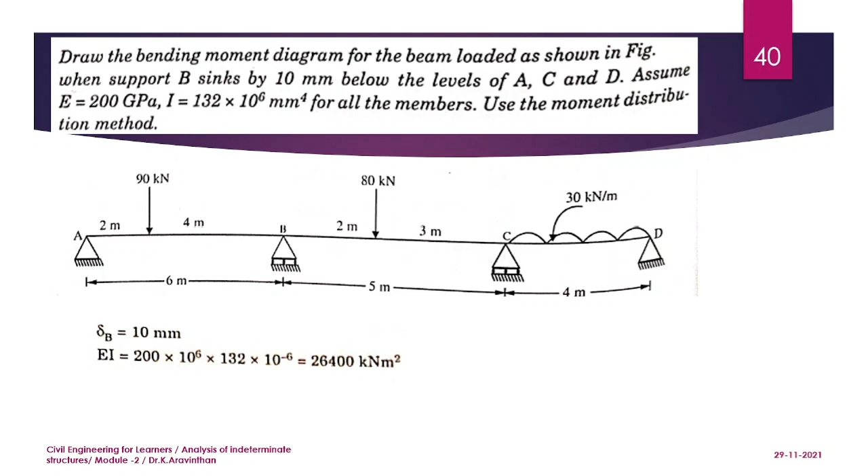Many things, those who are stopping, the good things should not be stopped. If it is stopped, then that is the prolonging of the wrong things which are happening in and around us. So, it is not for only projector I am saying. See sir, just if you switch it on another time I will do it, sir. Why sir you are speaking for such a 10 or 15 minutes for that? See, don't take in that sense. See, everything is a chain link.

You are having a point load of 90 kilonewton for the span A and B, and for B and C you have 80 kilonewton, and for C and D you have a UDL of 30 kilonewton per meter. See, this is the second case. In the last class we have solved a same settlement problem. A continuous beam which is having settlement is a second case in your analysis. First case is you will be not having any settlement in a continuous beam. This is the second case where you will be having settlement. Next case will be frame oriented problem.

Okay, when dealing with this settlement oriented problem, the steps are same. So what are these steps for solving by using moment distribution method? First one is finding the fixed end moment, and second step is finding the distribution factor. Step 3 is moment distribution, and step 4 will be final moment. So these are the 4 steps. Under one step you have some deviation; the rest of the things are same.

If you have any settlement, see, this 3 span continuous beam, the B support is settling. So if this support is settling, what happens? You will be having additional moment, and step 1 is writing the fixed end moment. In that I have given a formula for settlement of support. So what is that formula? In last class we have discussed a formula, 6EI del by L square. So this is the formula. Whatever span is sinking or support is sinking, at that span you have to apply this formula.

Fixed end moment. How to find the fixed end moment? So you have a span. What is the span? A and B. So this is joint A and B. You have a load of 90 kilonewton, which is acting 2 meters from support A, and it is not acting at the center. So what is the formula? W A B square by L square and W A square B by L square. These are the two formulas and you know them.

But another term is given. What is happening? A settlement is there. See, support A is not settling and support B is settling. So if this is sinking, this will be the deflected mode, isn't it? Like this, the structure is going to deflect. And what moment do you have to give in order to deflect like this? You should give an anti-clockwise moment. So hence the arrows are written here. And if it is anti-clockwise, you should use negative. So after writing WAB square by L square, you have to sum that, and while summing, this should be negative. So for MFAB and MFBA, you should use negative deflection.

And looking into span B and C, if support B is sinking, what happens? Support C will be at the same level and support B is sinking. You should give a clockwise moment, hence it should be positive. So you can see that 6 EI del by L square is positive here. So MF BC and CB have the positive sign here and you have to add in order to get the bending moment. So this is going to change. And for the span CD, you know that WL square by 12 is the formula. You can straight away use that.

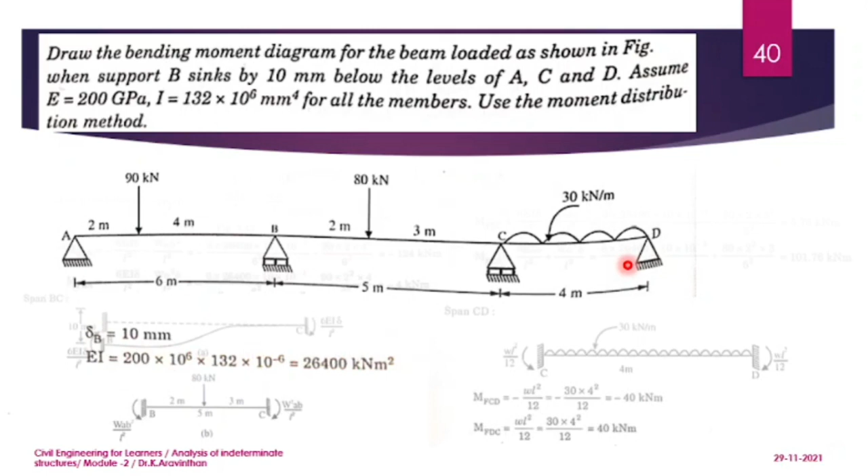Why is the deflection formula not used for span C and D? When support B is sinking, what are the members connected with support B? AB and BC. So hence you have to use 6 EI del by L square for spans AB and BC. CD should not be used with the formula 6 EI del by L square. Why? Because it is in no way connected with the deflection. Hence in its fixed end moment you will not have 6 EI del by L square. So check whether you are getting the same answer. Students, are you getting this answer? Minus 124

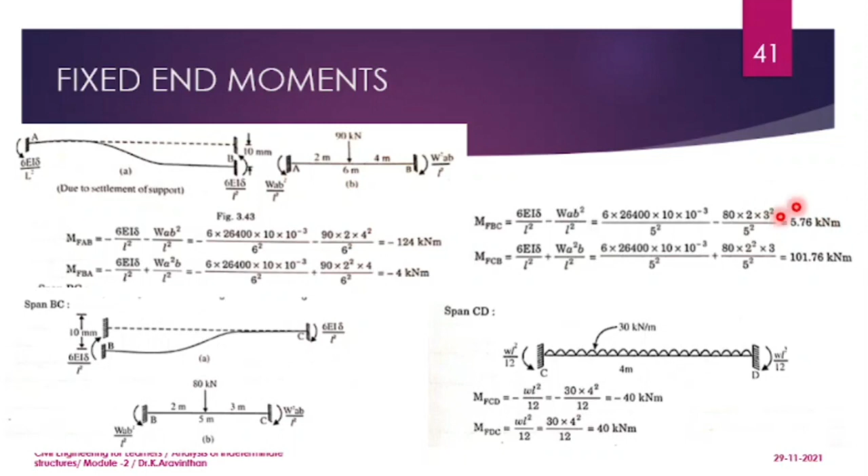minus 4 kilonewton meter. See, normally MFAB will always be negative and MFBA will always be positive. But why are you getting negative here? In a conventional problem, you will get a positive value here, isn't it? Why are you getting negative here? See, you have settlement here. Due to the settlement moment, the positive moment is fully taken, and you will only have the net bending moment. And here you can see that both are positive moments. Yes. Next, write down the next step, the distribution factor: joint, member, relative stiffness, sum and distribution factor.

You know that there are two supports which are intermediate. What are they? Joint B and joint C. So you are having two joints which have a distribution factor, and when you are considering joint B, what is the opposite joint of B? It is purely hinged. If it is purely hinged, you should use 3/4 I/L.

That is the formula. Then while taking B, B to C is partially hinged. Partially hinged in the sense it is intermediate between the two supports. Hence it is called partially hinged or partially roller. So you will be using I/L as the formula. The same way, C to B will be I/L and C to D will be 3/4 I/L.

Substitute this, you will be getting the sum of stiffness. So what is the sum of stiffness at joint B? 13/40, and for joint C you will be getting 31/80. Everything will be in terms of I. Now how to find the distribution factor? Divide 1/8 by 13/40. This will be your distribution factor, and 1/5 divided by 13/40. You will be getting the values.

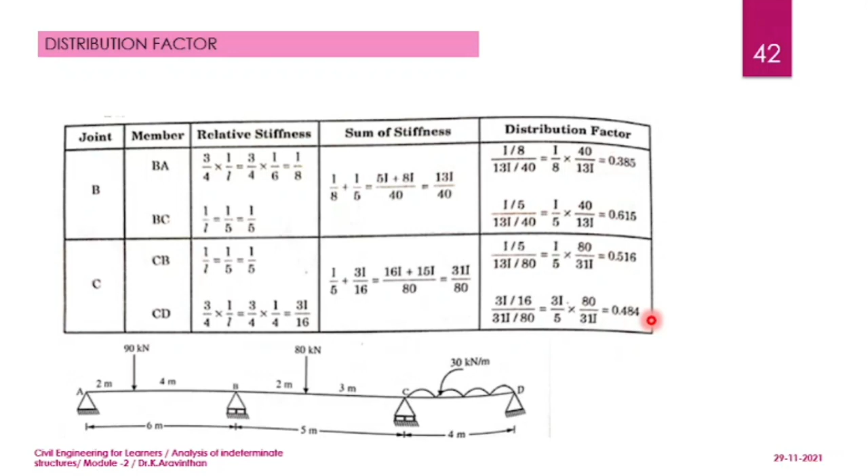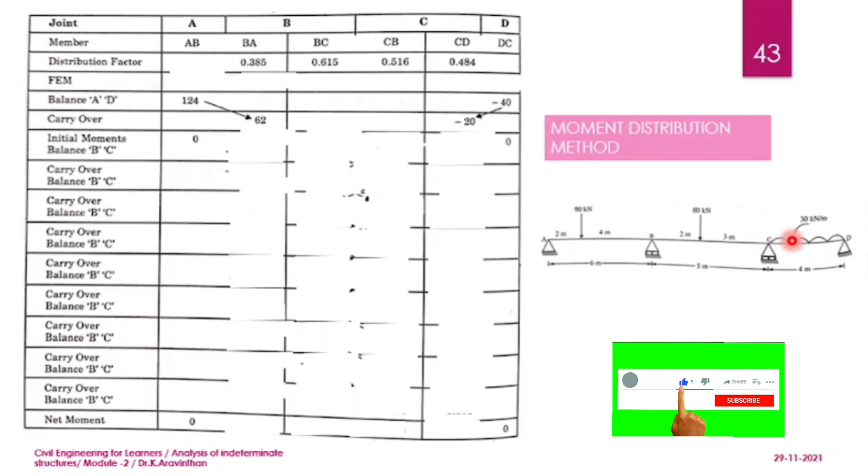So your answer will be 0.385 and 0.615. Similarly, when you add them, you will be getting 1 as your answer, and the next span will be 0.516 and 0.484. So this will be your distribution factor. Now the joints: how many joints are here? A, B, C, D. There are 4 joints, and below that you should write the members: A to B, B to A, B to C, at joint C you will have C to B and C to D, and at joint D you will have D to C. All the members are written here.

And what is the distribution factor you got? At joint A you will not have any distribution factor. At joint D there will be no distribution. At joints B and C, you got 0.385 and 0.615 at joint B, and at joint C you got 0.516 and 0.484. Next step is fixed end moment. The answer you got in step 1 is minus 124, minus 4, plus 5.76 and 101.76, and finally minus 40 and plus 40. So these are the fixed end moments you got.

Next what you have to do is balance. Why do you have to balance? See, your support A and support D are not fixed, they are hinged. So you have to make the 124 moment into 0. How? You have to add a moment of plus 124. The same way at joint D, if it is plus 40, apply minus 40, and half the moment will get carried to BA. If you have balanced at AB, half the moment transfers to BA. Likewise, if you have moment at DC, half the moment gets transferred to CD.

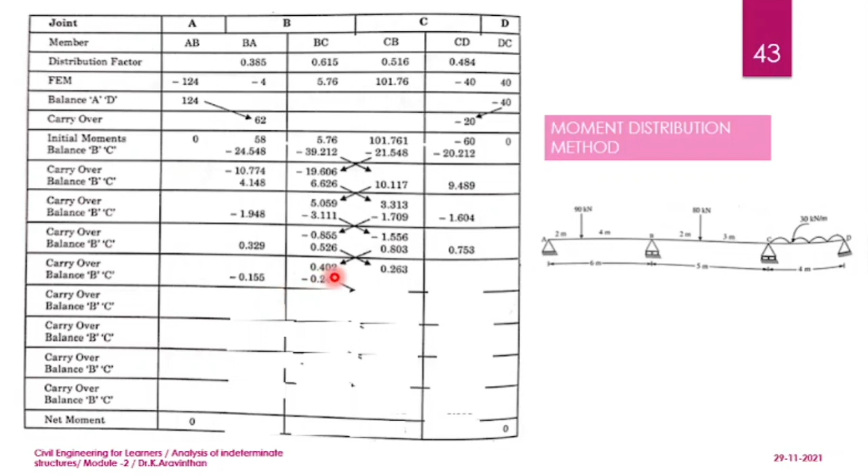Minus 0.402 into 0.385. It will be 0.155, and minus 0.402 into 0.615 will be minus 0.247. The same way, minus 0.263 into 0.516 will be 0.136.

Next value, minus 0.263 into 0.484. What is the answer? 0.127. Yes. Now it is nearly coming to, see, before the iteration you got 0.5, now you got 0.24, and if you carry over the half of the value, you got 0.068, and the other value is minus 0.124.

Now balance this 0.068 into 0.385, and you got 0.026, and next value will be 0.042. Now joint B is nearly balanced. The joint B is nearly balanced, you got 0.0 value. Now you have to concentrate on joint C.

Plus 0.124 into 0.516, you will be getting 0.064, and next value is 0.06. Yes. Now you can carry over this value. You got 0.032. Now you can stop with this. So with this you can stop, or else you can make two more carry over. So in examination point of view, you can stop with this.

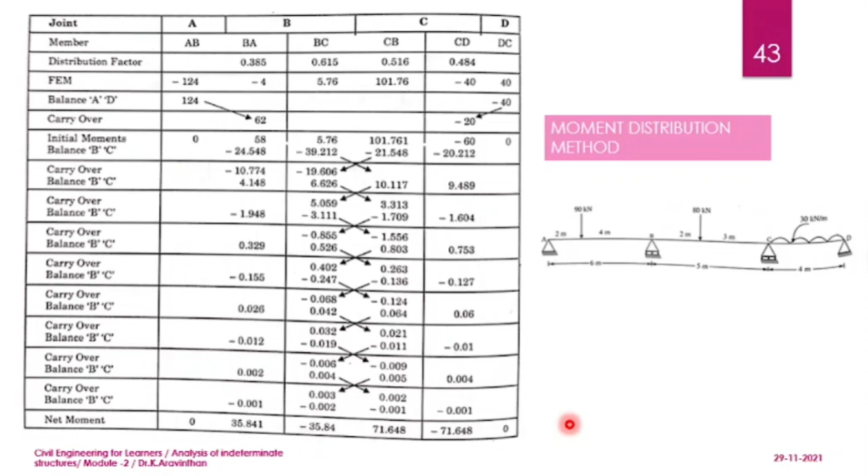Add the C joint. So what is the answer of C joint? Add all the values, start from 101.761, minus 21.548, 10.117, add all the values, 71.6, and the next value will also be minus 71.648. After getting that, draw the bending moment, draw your negative bending moment.

You got 0 and 35.841, next value is 71, connect all the points. So these are the moments what you got, and draw the positive moment for the span A and B. It is a point load, use WAB by L, you will be getting 120, and for span BC same condition is here, consider it as simply supported, point load is acting, and you can use WAB by L.

The answer is 96. And for the last span C and D, you have WL square by 8 as the formula, you will be getting 60. So you can draw the bending moment diagram.